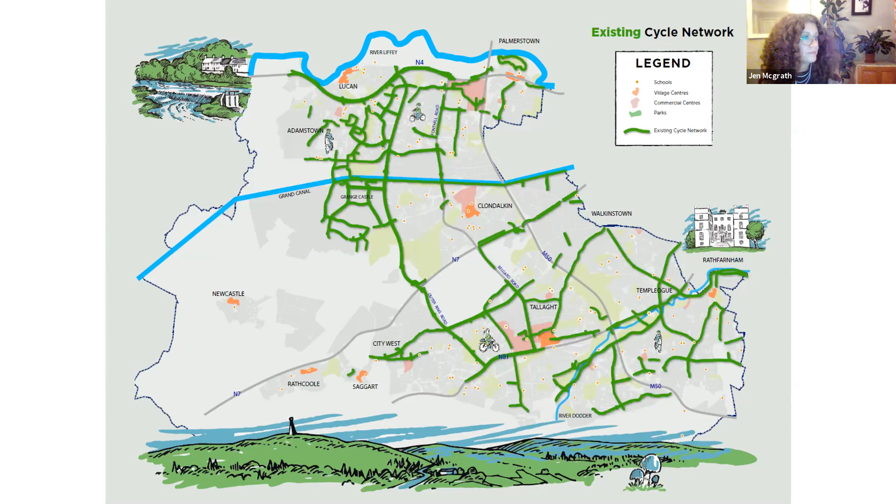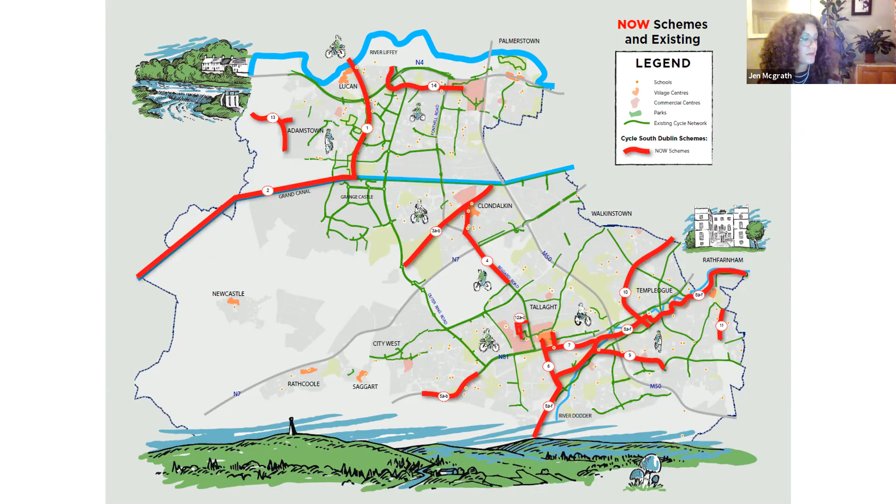The next one is the now schemes. I have another presentation that I'll show you about the now schemes, but there are 14 now schemes altogether. The first one is the Celbridge Link Street, number 1 on the map, 3 kilometers of cycle lanes, completed next year.

The next project is the Canal to Lucan Urban Greenway, 4.3 kilometers, number 2 on the map. Number 3 is the Monastery Road in Clondalkin, with 600 meters of cycle lanes.

Number 4 is along the N81 in Jobstown, where 600 meters of cycle lanes will be constructed, starting this month. Number 5 is the Belgard Square North Link Street into Cookstown, with 510 meters of cycle track to be completed this month, hopefully open to the public in January.

The next one is the Tallaght Town Centre scheme, number 6, with 600 meters of pedestrian and public space to be completed. Wellington Lane's permanent scheme, which currently has a temporary trial scheme, will have 3 kilometers of cycle track built, finishing next year.

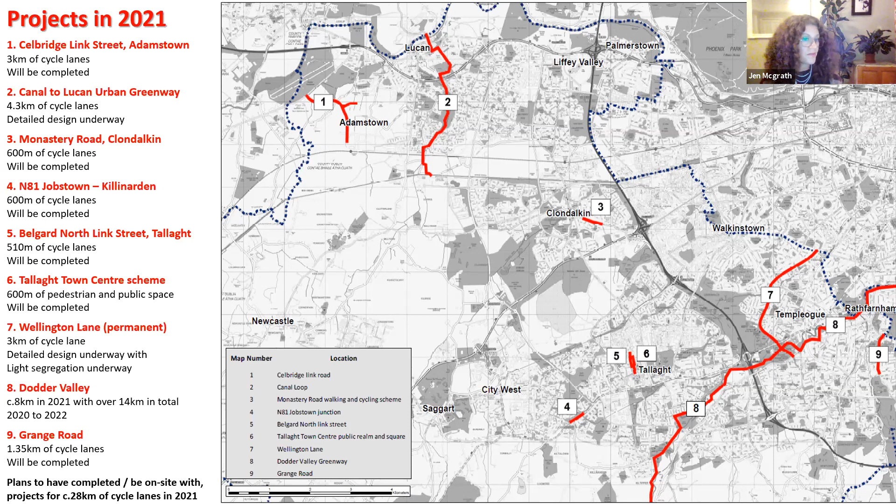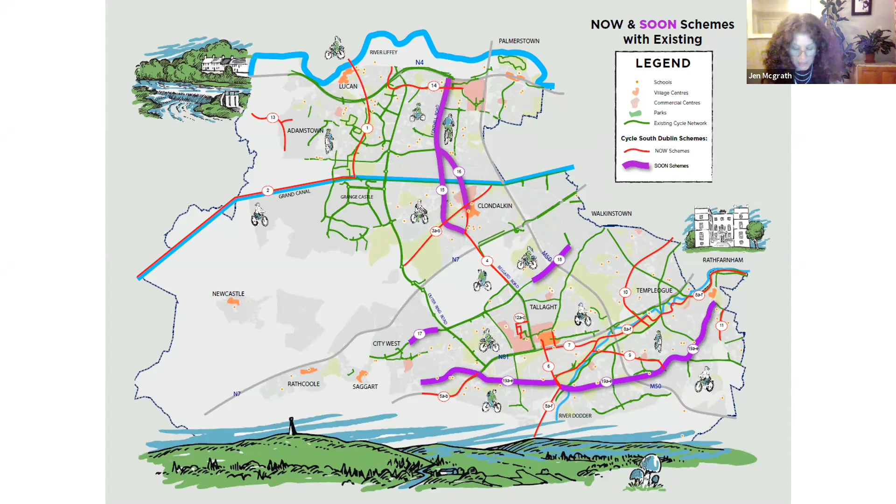The later schemes are now added to this map, with 10 of those, approximately 35 kilometres of cycle track at a cost of 50 million. This map also has the BusConnects added in, and together there are 47 projects which will deliver over 240 kilometres of cycle track over the next 10 years.

We do hope to deliver more than 240 kilometres and more than 47 schemes. It's an ambitious programme, dependent on staff resources, planning, and funding streams, but if we manage to get those in place, we would like more projects and to achieve more within the 10 years.

Next, design work and funding. The final agreed programme will guide the cycle work and priorities of the council, so hopefully you'll make a submission. The public consultation is non-statutory but open until the 18th of December, and we'd love to hear your views if you haven't already. You can find it on the consultation portal for South Dublin County Council.

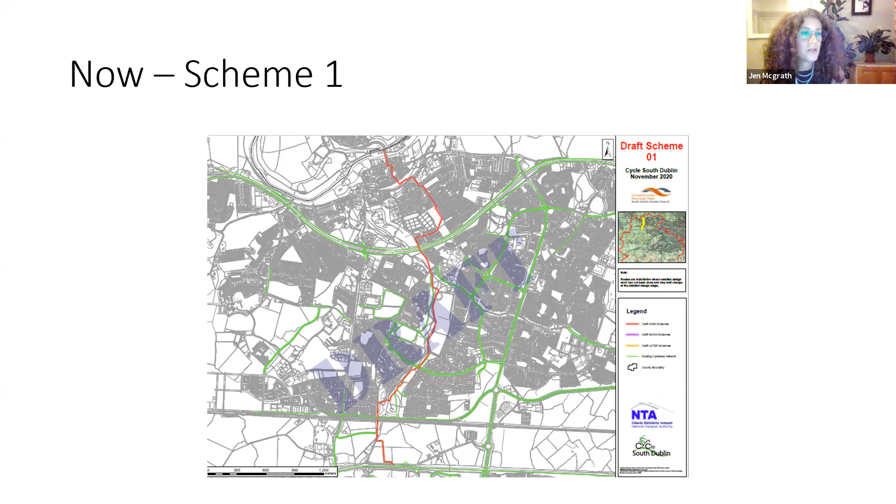So that's scheme number 1 - they're in no particular order by the way, just because it's number 1 doesn't mean it's going to be done first. This scheme is the Lucan Canal Loop. I'll read from the document exactly what it is because I don't want to get them mixed up: it's a cycle lane which will connect the Grand Canal and the Royal Canal. The design options for SDCC selection is underway, and a non-statutory consultation will take place in late 2020. If anybody has any questions I can come back to the maps and we can have a look later on.

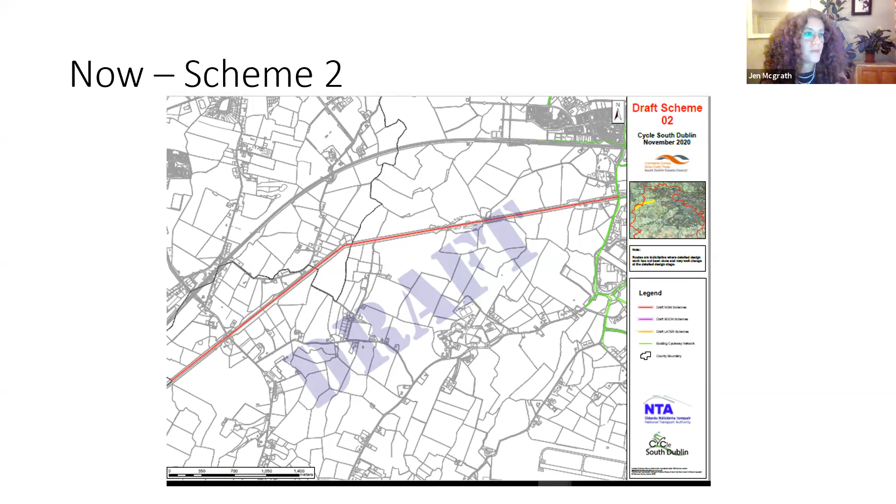Scheme number 2 under the now schemes is the Grand Canal extension. This Part 8 approval is in place, and that's why this one is quite a good scheme, because once the planning is in place, half the battle's over. So that's a good one, and it's a now scheme.

The next one is Corkagh Park to Grand Canal. This cycle route will be from Corkagh Park through Clondalkin Village to the Grand Canal. Design work has not yet started, the preferred route has not yet been selected, and the design will need to provide a connection across Clondalkin Village. So that one is actually quite an interesting project.

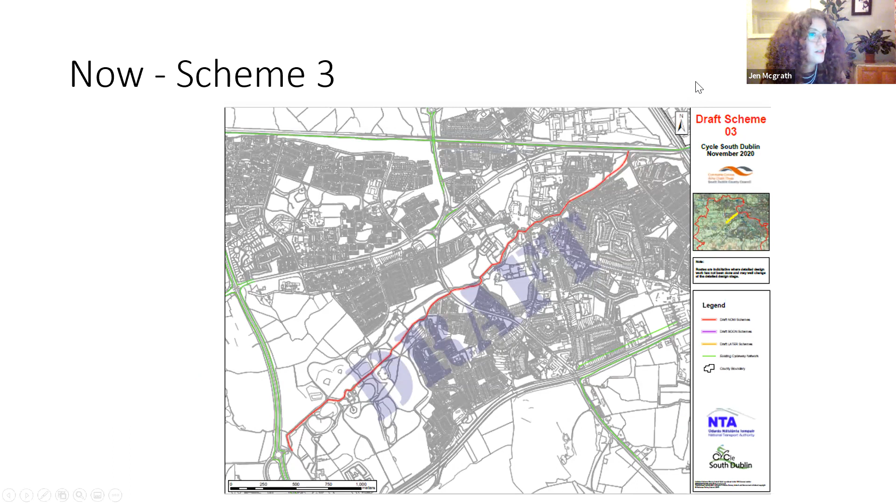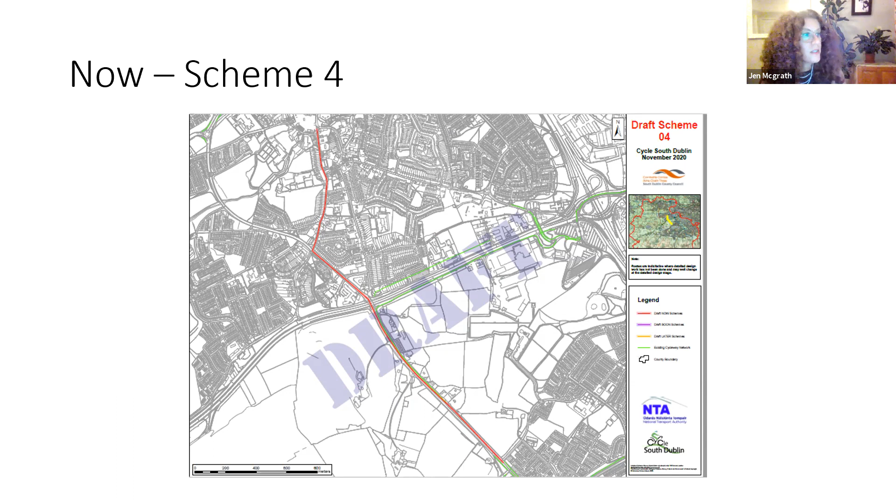Number 4 then is Tallaght to Clondalkin Village - an enhanced cycle route from Clondalkin to Tallaght. Design work has not yet started. There are a number of complex issues that need to be resolved here, the main one being the Naas Road, which is right in the middle there. It's going to be a bit of an issue, but we'll get over it and work it out.

Scheme number 5 then is the N81. We have 2 schemes here: we have a scheme which is the Jobstown Junction to the N82.

Part 8 approval is in place. However, the design may need to be revisited to address challenges on the western section of the route close to the N82.

Number 5B then is the Jobstown Junction. This scheme is underway at the moment, starting in December, and many meetings have taken place, so it's going ahead. Part 8 approval is in place and works are due to start on site in November 2020, but actually they're going to start in December, and it should be complete by summer 2021.

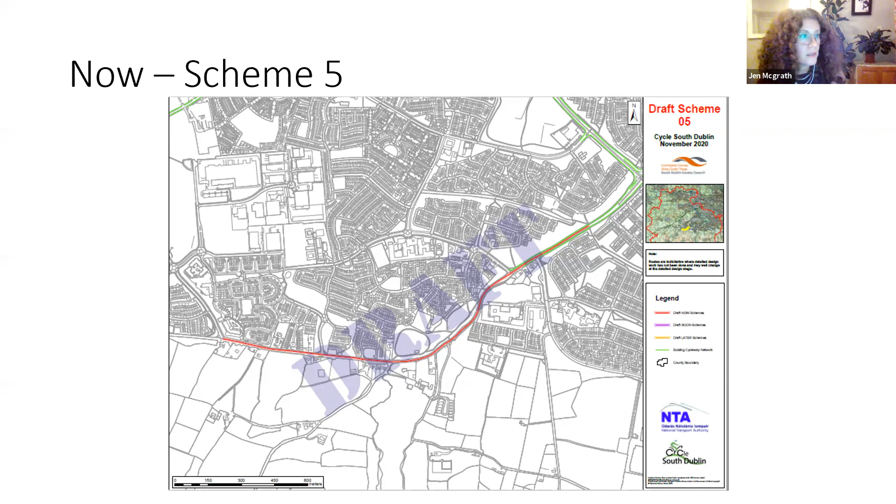Number 6 then is Tallaght Village to Dodder Valley. It's a new cycle route from Tallaght Village to the Dodder along Old Bawn Road. The design work has not yet started. The design will need to address the N81 Old Bawn Junction and the interface with residential along this road.

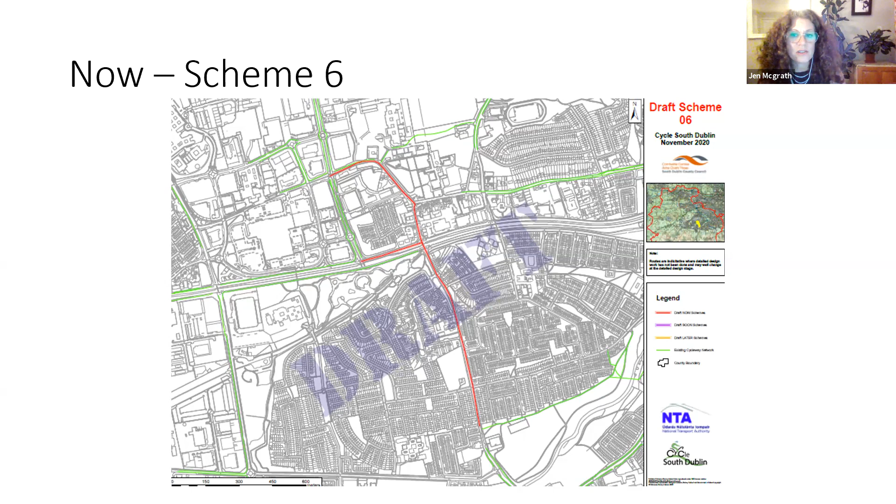Number 7 then is Greenhills Road to Dodder Valley. It's a new quiet way cycle route from Greenhills Road to the Dodder Valley, including quiet way works along Avonbeg Road and a greenway link to the Old Bawn Road. Design work has not yet started, and a significant challenge will be the footbridge across the N81.

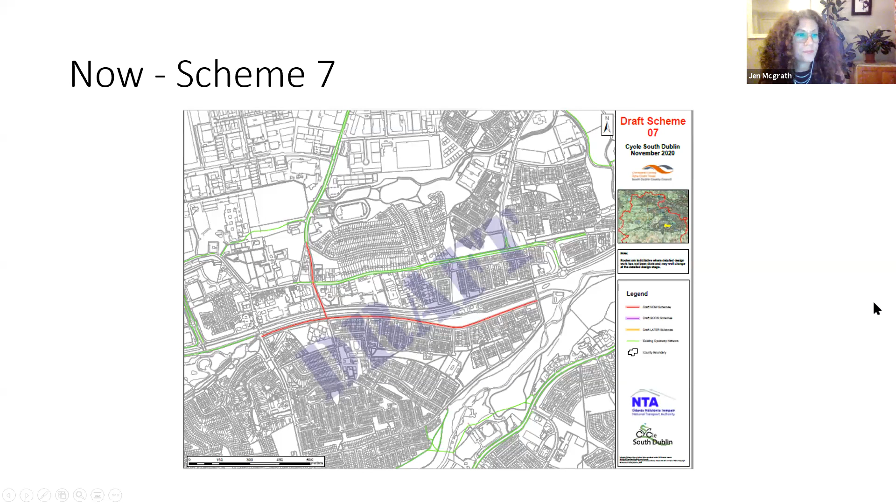Scheme number 8A is the Dodder Greenway Bridges. As you probably know, the Dodder bridges are all installed, and we hope that they will be open to the public by February.

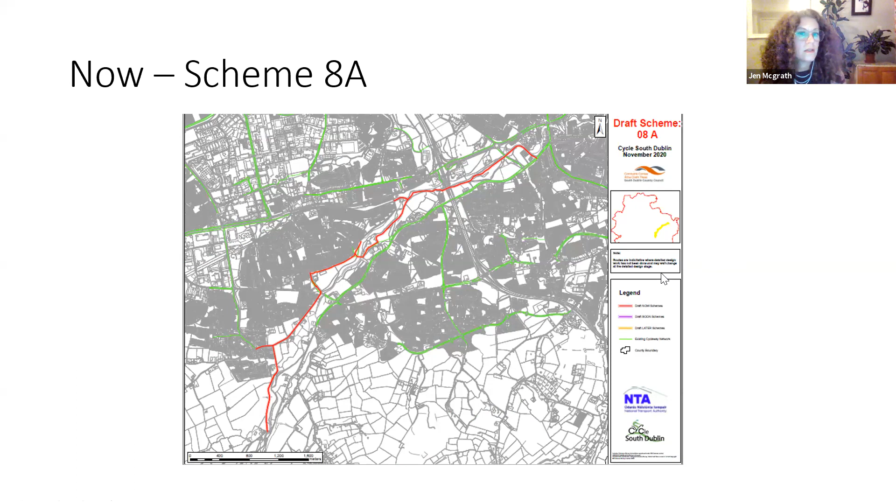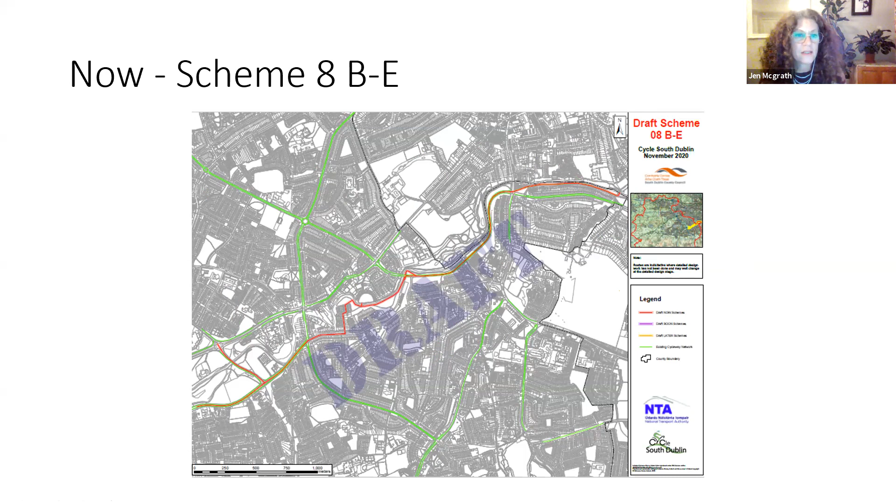Scheme 8B to E is the Dodder Greenway links. There are 5 new links to connect surrounding areas into the Dodder Valley. Design work is underway and Part 8 planning approvals will be needed for some of them, but most of them are complete. Number 9 is the Firhouse to Knocklyon scheme.

Part 8 approval is in place. However, this may need to be reviewed in sections.

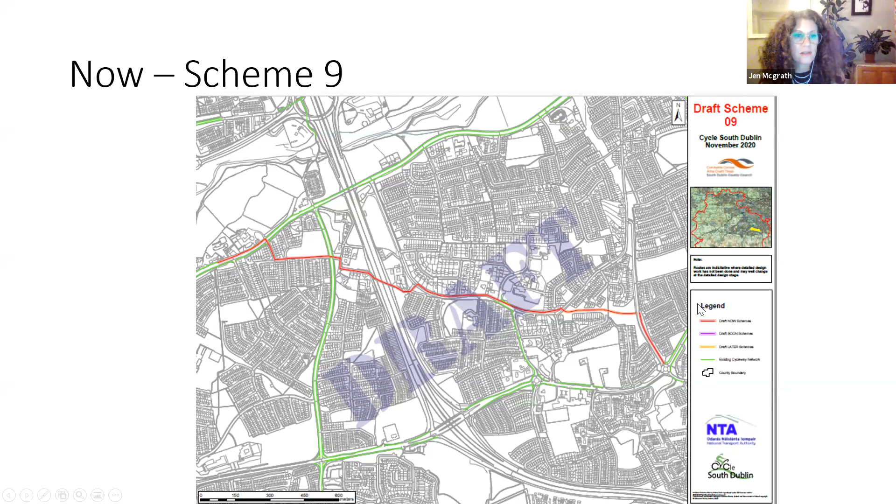Number 10 is the Wellington Lane cycle scheme. Design work is underway and a trial will be implemented in November. It actually started on the 30th of November to put the infrastructure in place, so we just about got in there, and it will be complete in the summer of 2021. Then we will progress with the Part 8 planning for the permanent scheme. We're hoping to begin that in April of 2021.

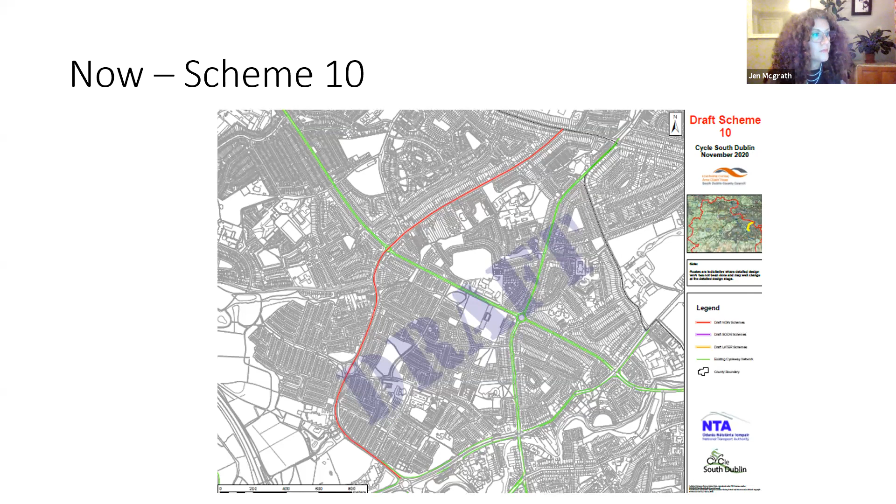Scheme number 11 - I know these are hard to view, but if you do want to come back to them, I can. This is the Grange Road, Nutgrove Avenue to St. Enda's Drive. Works are starting in December 2020 and it should be complete by summer of 2021.

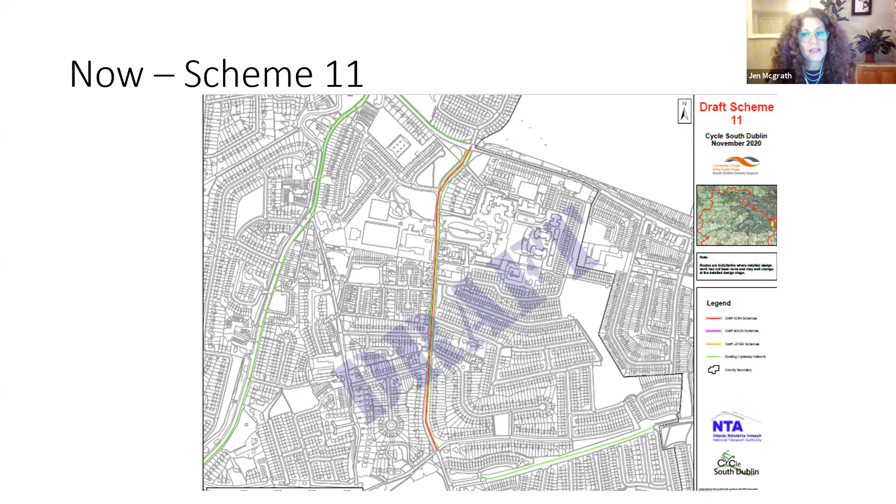The next one then are Tallaght Streets. There are 3 sections to this. A is the Belgard Square North Link Road to Cookstown. Part 8 approval is in place. Works are underway and it's due for completion early 2021.

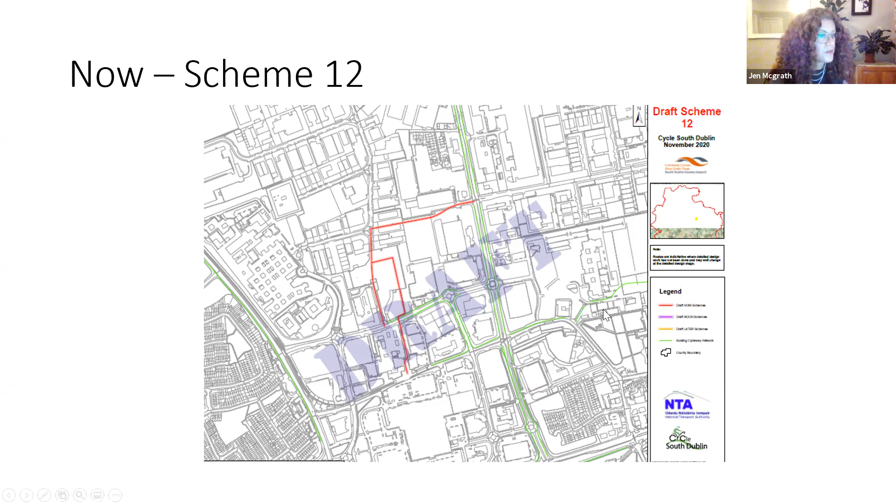B is the Airton Road extension. Detailed design work is currently underway and Part 8 approval is required. C is the Public Realm and Plaza. Part 8 approval is in place and the council will be moving forward to procure a contractor and commence works on site in 2021. So that's quite an interesting little project there - there's quite a few going on in a very small area.

Scheme number 13 is Celbridge Link Road. Part 8 approval is in place and works are currently underway and the completion date is late 2021.

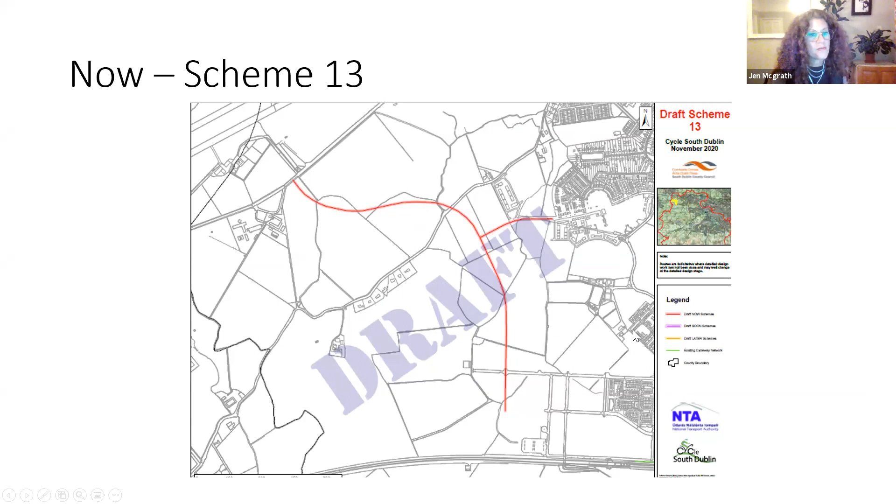And the final project within the now schemes is the Liffey Valley to Lucan. The first one, A, is the Arc Roundabout to Liffey Valley Centre - an improved cycle lane from Liffey Valley to Lucan. Design work has not yet started. There's a significant design challenge at the Arc Roundabout.

And B then is Arc Roundabout to Lucan, an improved cycle lane. There are a number of improvements already in place, but further work is required and design work has not yet started on this one either.

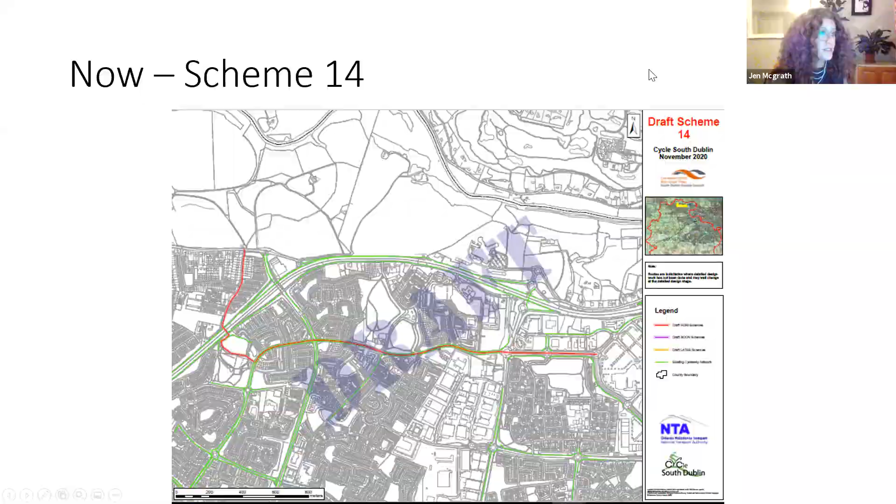And that's me then. That's me done. Thanks very much, thank you Jennifer.

That's very interesting, and I think we're all agreed that there's very exciting stuff coming down the tracks within the county and we look forward to it. Can you take 1 or 2 questions at this stage?

Yeah, sure, no problem. Simon wants to know what's the difference between this and Bus Connects and were they designed in concert?

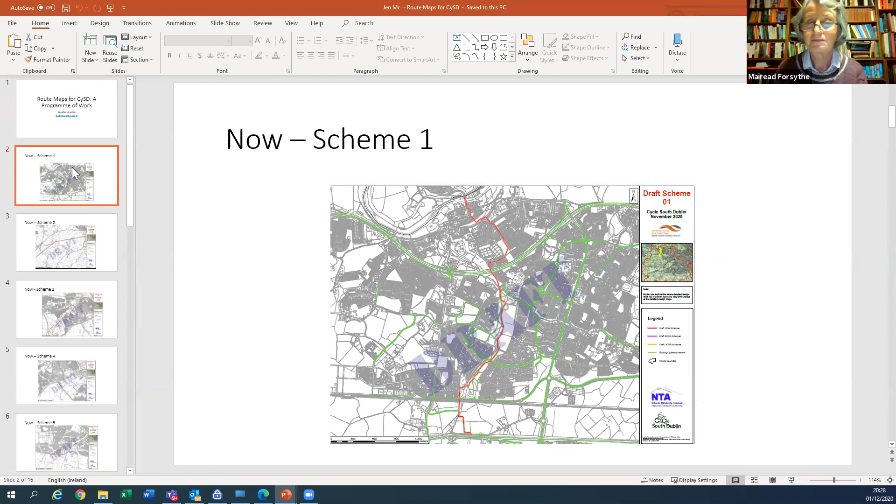Bus Connects was ahead of us, so we decided to let Bus Connects do whatever they wanted to do, and we'd row in behind without interfering. For example, Greenhills Road, which isn't on any of our schemes, was a scheme we had in place before Bus Connects decided to upgrade it. So we parked that and let them upgrade it. That's how we're interfacing - we won't do works on roads we know they're going to upgrade, and we'll let them run the public consultation around the cycle track and bus route.

Another question from Ali: will the public consultation process change the priority? Might a lot of positive comment bump a proposal up the waiting list? Yeah, absolutely. There may be schemes that get bumped up and some bumped down, depending on whether we already have planning in place - we might move forward with a scheme that's already got planning and funding. But we will move things around, and I'd envisage new schemes being proposed that get put into the program that we don't know about yet.

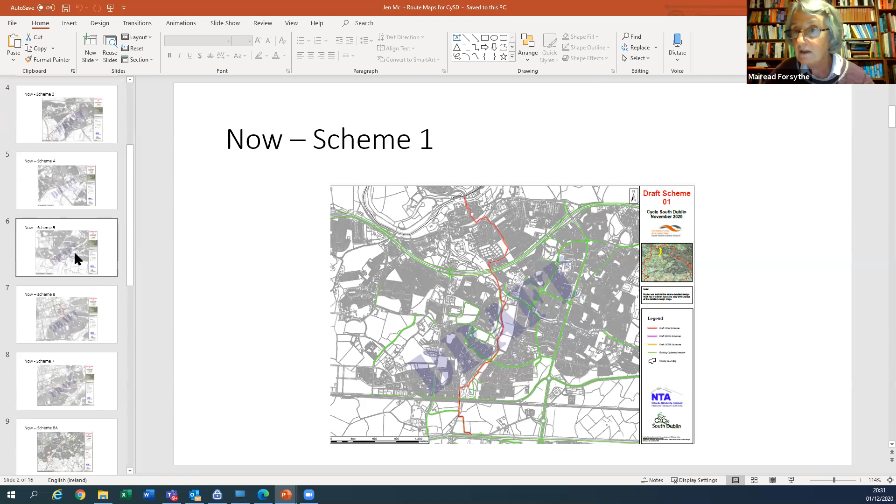So I'll just read out what we have put in: Part 8 approval is in place, however this may need to be reviewed. There are some cycle tracks in place at the minute along Scholarstown Road - this is St. Colmcille's Way, I believe, the road from the M50 up to the Orla roundabout. Some cycle tracks are in place in some green areas, and some of the roads still require the cycle tracks to be built. We're saying Part 8 is in place, however this may need to be reviewed. I think it's because of the difficulties we've experienced within that area, but to be honest I'm not sure - I'm trying to scramble for ideas here as to why.

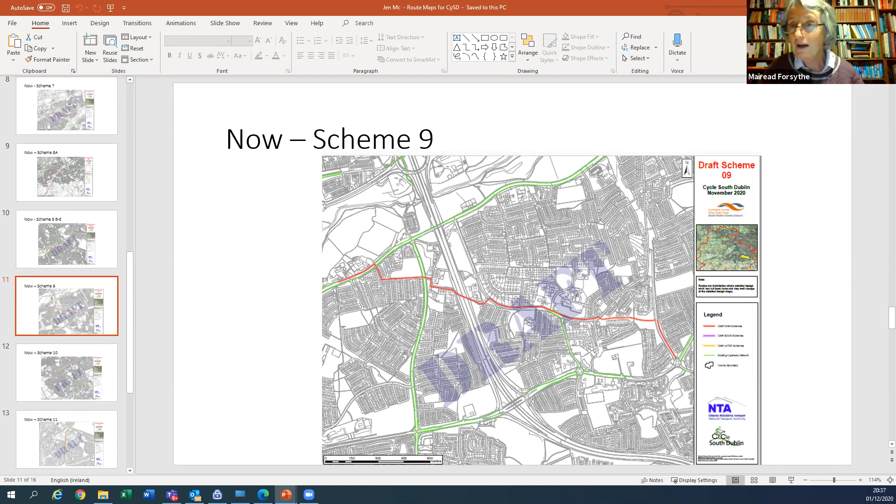I don't know, has Jennifer frozen? But certainly I would encourage people to put in submissions of general support. I think we're used to the idea that sometimes a very vocal opposition can defeat a plan, so if you want to see Cycle South Dublin implemented, send in a general submission of support. Sorry, Jennifer, you seem to have frozen up.

Anyway, I think it's time to move on to the next section, which is to talk about Bus Connects. The idea here is, Myrna, I think you're going to share a screen.

There are seven Bus Connects routes within South Dublin County. One of them really is Kimmage to the city centre, so it doesn't go through the county, but many of you may use it. The people involved in the campaign working on submissions for the Bus Connects proposals are going to give a rundown on what's been proposed in the latest round, and what will be in our submissions to the National Transport Authority. We'd urge everybody, when the submissions go up on our website, to look at them and make your own submissions before the 18th of December.

We'll start with the first person to talk, Martin Quinn, who's going to talk about routes 6 and 7, Lucan and Liffey Valley to city centre. Are you ready to go, Martin? Yes, I am. Can you hear me? We can, perfect. Okay, I'll just give you a quick overview of the route.

It basically goes from Lucan Village along the N4, past Woodies, into Palmerstown Village, and as far as Chapelizod. It's going to be a two-way cycle route on the north side of the N4. Could I have the next slide, please?

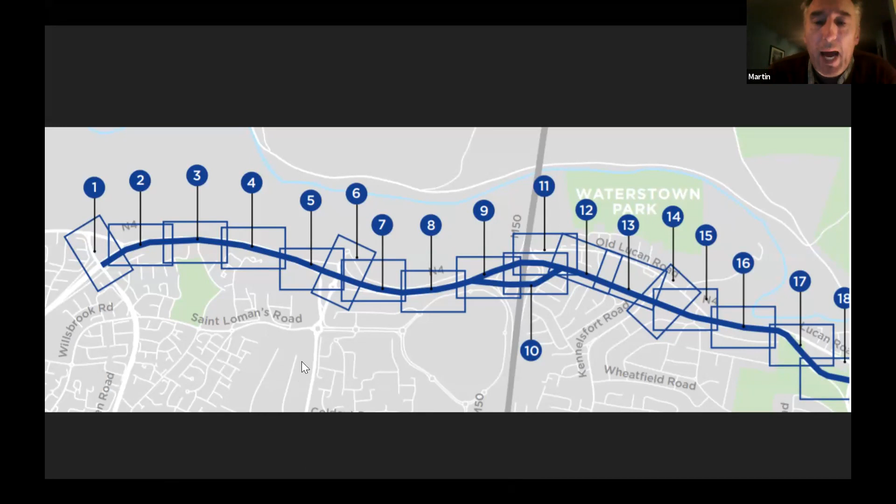Okay, so I attended the meeting, and overall most people were in favour of the cycling lane. From Dublin Cycling Campaign's perspective, we are broadly in favour.

We did ask some questions, like will there be a buffer zone from traffic on the N4? And the reply was that due to the trees and space constraints, that's probably unlikely.

Without a doubt, the biggest contention was the removal of 50 car parking spaces in Palmerstown Village. Some of the resident associations asked, could it be made a quiet way? But the NTA was of the opinion that it was just too busy to be a quiet way.

It also ends at Chapelizod, where the city takes over, and the NTA was of the opinion that the city has its own plans. And so that's the reason why it ended there.

Chapelizod Hill is going to be widened as shared space with pedestrians on Chapelizod Hill. At the moment, I don't like it at all. Cyclists build up speed on that hill, and it's very dangerous for both pedestrians and cyclists.

So it is going to be widened by an extra metre or so. Hopefully that will make things a little bit better. But overall, very good from a cycling perspective.

We're getting a two-way cycling path on the north side of the N4 all the way to Chapelizod. That really wasn't there before. And we're protected going through Palmerstown.

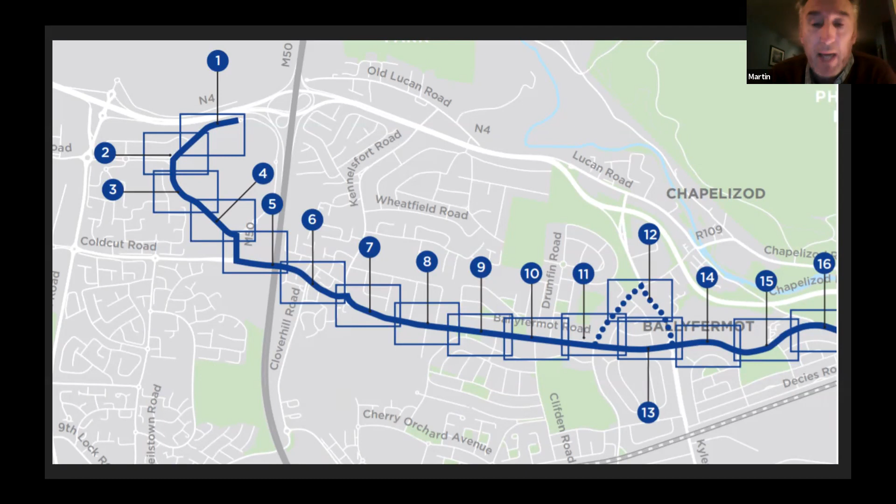So it's a huge increase in cycling facilities for the general population. It's an amazing amount of work being put into it. Could I have the next slide, please?

And that's fine. Some trees will be removed from across the road from Markievicz Park, but that'll be kept to a minimum. Some of the disability groups have asked, will all bus stop locations have clear demarcation from cycle lanes? And that is yes - they will be a separate colour, and there will be a height difference for pedestrian and cycling access.

Some of the residents' associations have asked for add-ons, one particularly from Emmet Road down to Inchicore, and also from Kennelsfort Road to add onto the cycling plans. But the NTA decided that was mission creep and decided against it. That actually depends on South Dublin County Council adding those facilities.

So I'll now pass you on to Aidan, who will do Clondalkin and Green Hills.

Hi everyone. Thanks very much, Martin. Fair play, well done. Just a quick run - there, one's not so bad a route, the other is a mighty route down from Green Hills.

But just to say, I went along to the webinar for routes 8 and 9 as well, which the NTA held, and had a very detailed kind of rundown on the routes, and it's all available on the portal.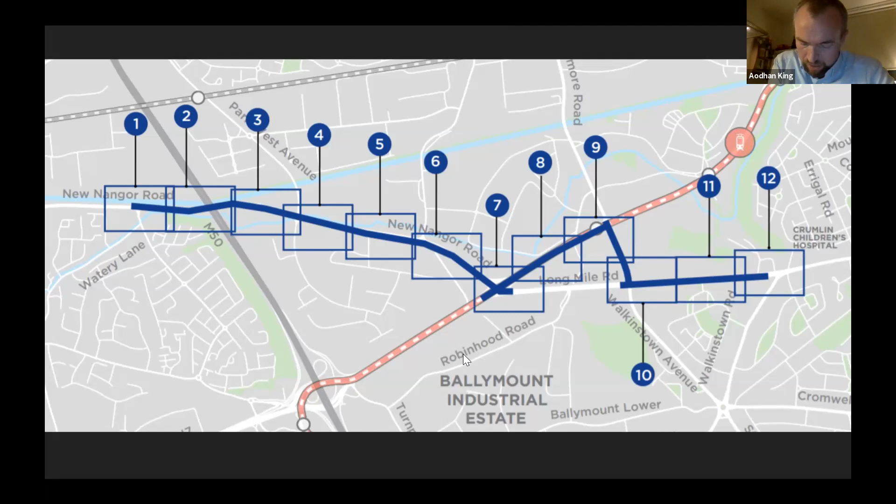So then it meets up with map 12 there, it meets up with CB9, which is the Green Hills route. So I'll just go on to the next slide there. Sorry, Mairead, thank you.

So there's an example - kissing gates connection to greenway. That's at the very start at the Clondalkin end, which connects there. I have some photos of families of literally 6 or 7 people lifting their bike, a family, over that kissing gate when I went out for a look. And that's a major connection there to the estate and to the south of that.

As you come down, then there's the M50 overpass, which in fairness now they've provided an access to, just probably about 50 meters down the road, and that's to be open. But that needs to be cheered up a little bit under there - I think security is important, like how people feel, they need to feel safe traveling these routes. That's actually a big issue with that Greenway as well, how safe and permeable it is. If it's going to be looked at as an option for people on the BusConnects routes, then that needs to be improved and allowed for as well.

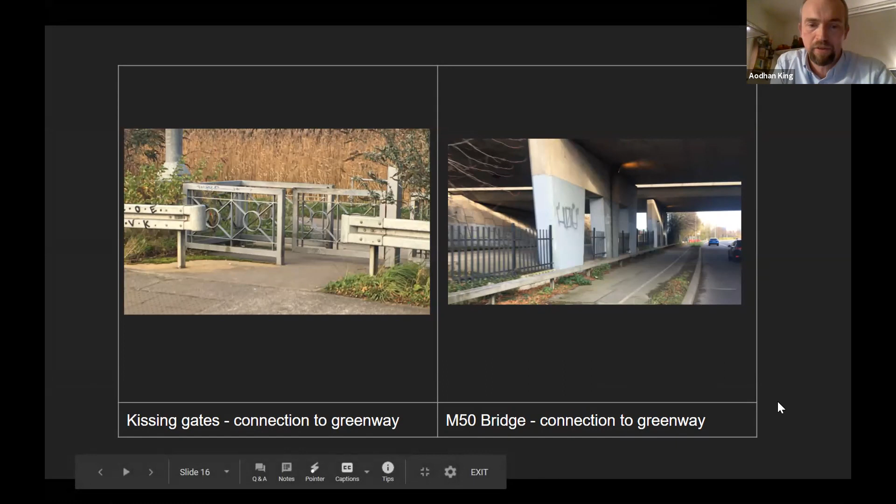Okay, so just on junctions, that's a typical one coming down the Long Mile Road into one of the units there. You're left to come off a footpath as it is, but the new junctions, as you can see, they've put a raised table for pedestrian access, but haven't included the bike lane on that. That's a big piece I'd be keen to push.

I'm sure we all would. So separate the bike from standard traffic. Now it looks dotted, obviously to be finished in design, but it hasn't been. The NTA said at the meeting that they had done a lot even since this was issued.

That's why I think there's another round, Ray, because I think they said themselves they hadn't got the drawings up to a point yet where they were ready, really, fully even. So...

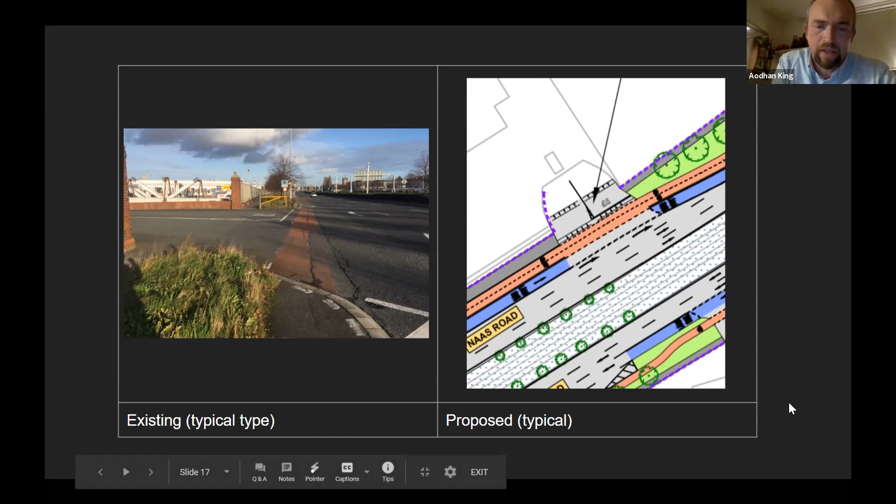Anyway, from that, next slide. There's just an example of what I mean, we'll put in something similar. I think we'll probably get some stock images, Mairead. I think it's good to show all of us that this is what we're looking for, a clear separation from the road, so cars have to stop and think before they turn left into oncoming cycling traffic, and cyclists have as much right of way to keep their momentum as they move into town.

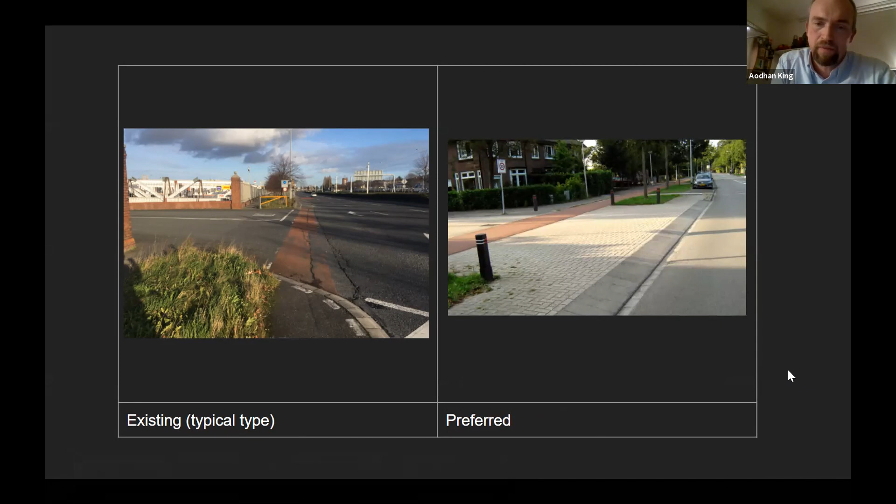Okay, next slide. I'm probably over-emphasizing the point here, but that's what that is—it's the same figure again, the Nangor Road. I'm just saying, as you come into town, it's the same: the whole way coming into town, the secondary road takes priority each time over primary right-of-way traffic. That needs to be done away with, I feel, to make us safe.

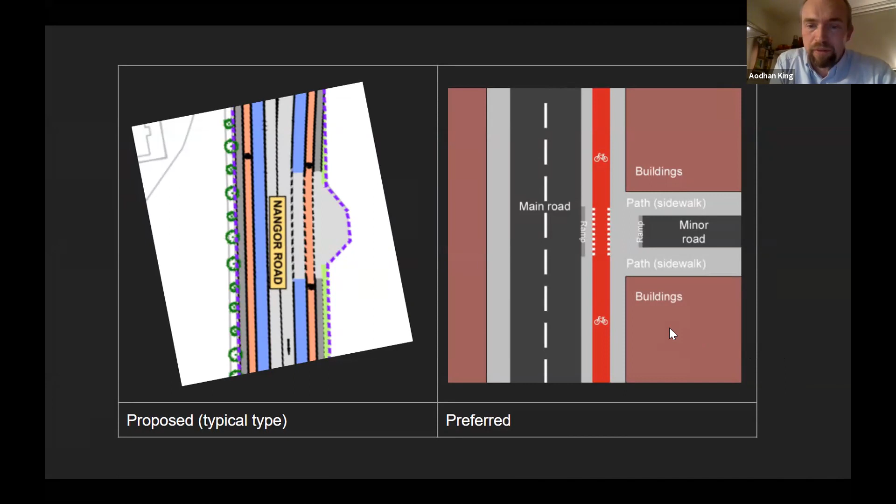Okay, next slide. So one of the jewels in the crown of South County Dublin, now known as the Hamburger Junction, which is up to date. Before this, I only knew it as the Long Mile Road roundabout or whatever it was. So they couldn't come up with a clear, safe route around it for cyclists.

So they came up with an overpass. Well, they discussed an underpass, but that was dismissed because of costs. That was put forward by Owen O'Brien and a couple of other people at the time, and the costs were said to be too expensive.

So they've put an overpass, but unfortunately this still-to-be-determined design is one of these big double ramp affairs, getting up to a height—you have to come around on yourself three or four times before you get over onto the roundabout. Honestly, as a cyclist, not particularly competent myself, I would probably take my chances with traffic as opposed to spending 40 minutes trying to get over the bridge.

So we think there are options, and we think NTA need to look at new options. This is a major gateway to the city, and it's a real opportunity to show how 350 million euro a year in cycling can be spent, and I think we need to go there.

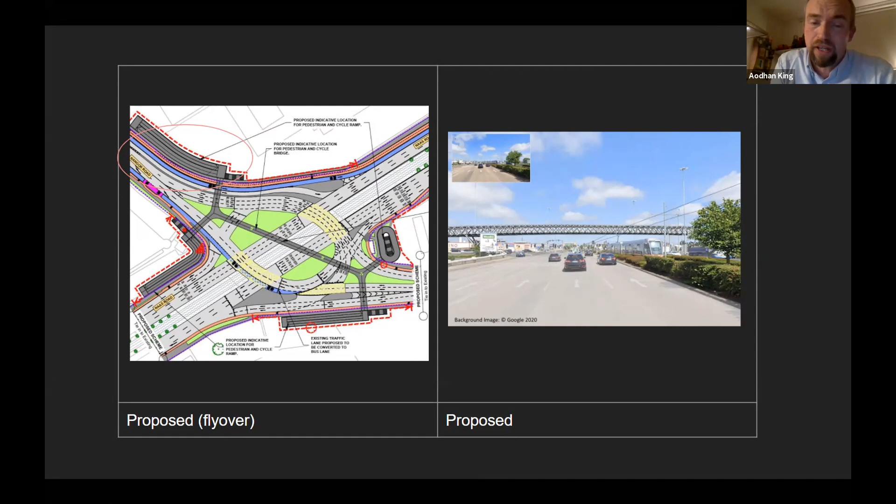Now, it doesn't look bad from here, but it's this typical design of cage steelwork over a road. Next slide, we probably show what good looks like. So there's the Long Mile Road as it looks, and here's the Hovenring in Holland, which is, in fairness, like a ramped-up access. There's a lot of space needed to get to it, but it's there, just to give an idea.

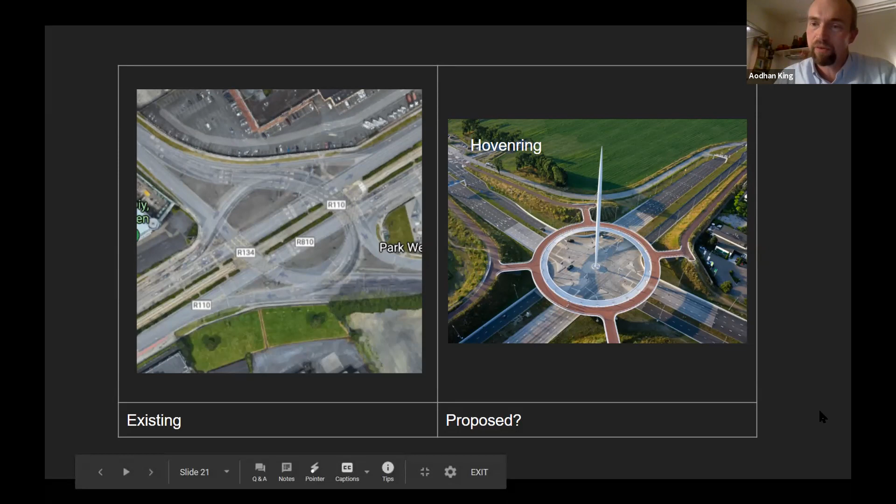Look, a bit of engineering, guys, a bit of thought into what might work here. In the existing layout you can actually see the road lines there—loads of spare space to build things up and to suspend things off. Surely with a bit of creative mind and engineering foresight, these guys could actually put something in place that could really be a totem to the rest of the world for Dublin, and South County Dublin at that. Next slide.

And then I spoke about the desire line, that the BusConnects brings us down the Long Mile Road as far as the FBD there and the old Naas Road, and then takes a right down Kylemore back to hit the Long Mile.

That obviously is going to dissuade cyclists from cycling into town. I know it's about buses, but part of it is trying to get the infrastructure in there. That's just an example of how a desire line works in reality - people will follow the shortest path. So I do think it would be worth them looking at that connection to see if they could improve it even from a cycling infrastructural point of view, to aid their Bus Connects project, or even South County Dublin, if Jen's still there, we could look at that.

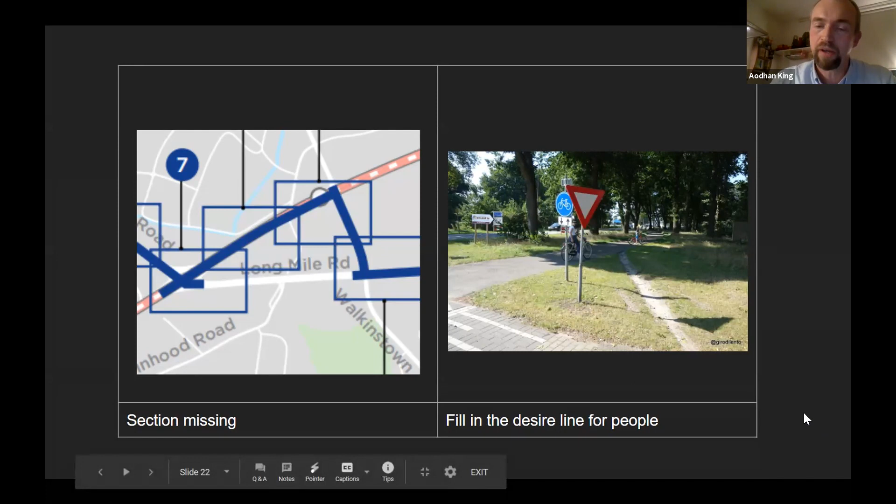This is something they've kind of stuck to - how things seem to work on the Long Mile Road. There's a lot of schools, we have Aldi now, we have a lot of big shops, the Farmers Cafe. There's a lot of people coming up from Walkinstown Court, a huge estate out the back, and they follow that road, and none of them use the pedestrian crossing as it stands. I took photos there, people just coming across from the road. So that should all be a raised platform, access for pedestrians coming across, to slow down traffic along that road.

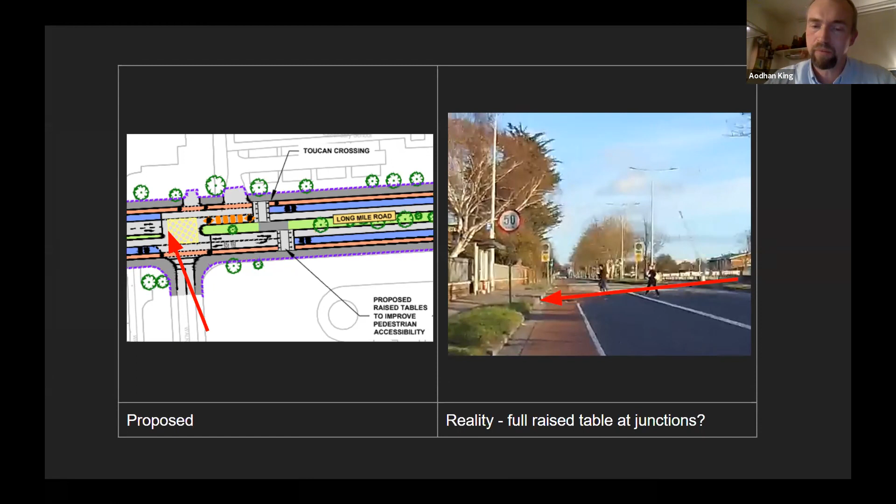That's an awful place to be. Actually, I noticed in their new greening brochure, they had removed the green line of tree buffers in favor of just keeping the footpath and not actually improving the urban realm element of it. So those things need to be brought back in, definitely, because it's just a speed tunnel as it stands.

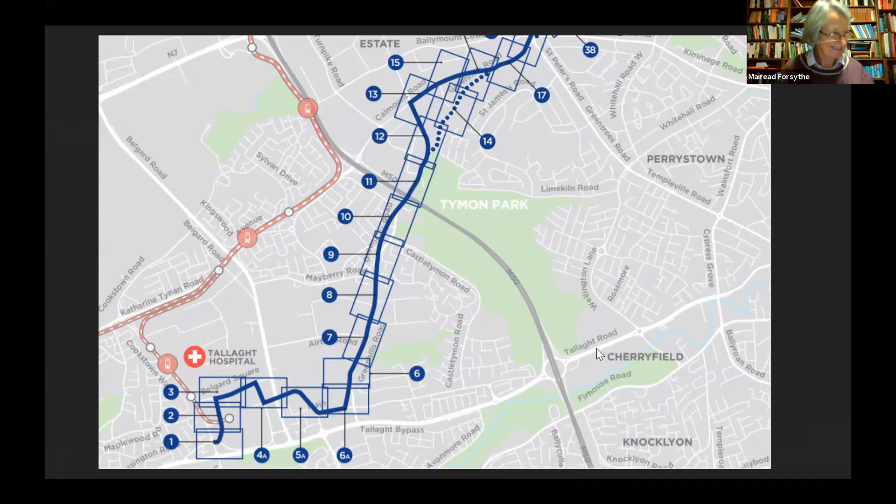I got a bit, okay, Grant, thanks. I got a bit snap happy on that one. So, okay, so back to Green Hills, which is the main one. I have a minute. I'd say I won't want to labor too long. About a minute, yeah. I have a Mairead, but this is like 44 maps, right? So I didn't know what he was getting into when he took this on anyway.

So really Green Hills, what can I say - it's serviced by a really great connection from the Poddle, or from Green Hills down through Poddle Park, the back of the basketball arena, and into Tymon. So actually there's loads of potential soft routes for cyclists and other people coming down the way, which I think need to be looked at in general around this route. But there's obviously the main Green Hills route, so I'll just talk about that as we come down.

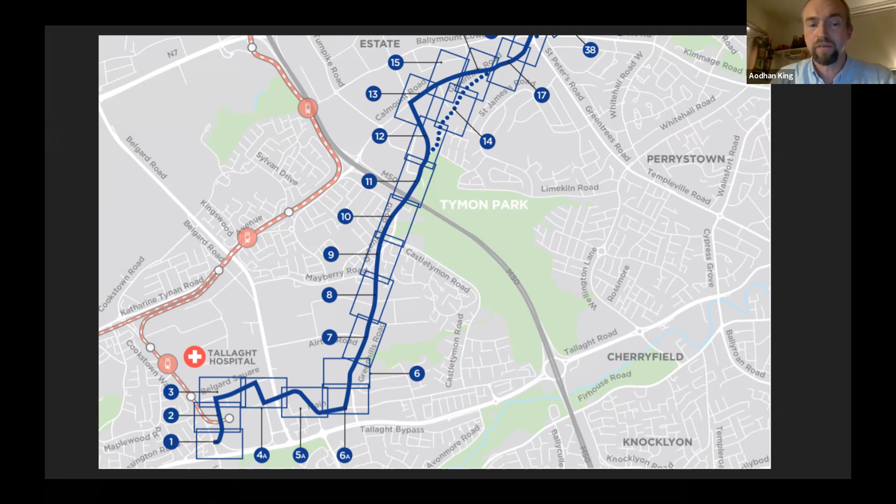From Tallaght, there's a whole new bus interchange at the start. It's mad - there's no cycling allowed for, no segregated lanes up there. So it's just literally about getting people on buses, but there's nothing about the community being drawn into Tallaght to bring their bikes in, cycle to the bus, and then take their route onwards to Dublin City. I think we really need to raise that as an important one as part of the Green Hills route.

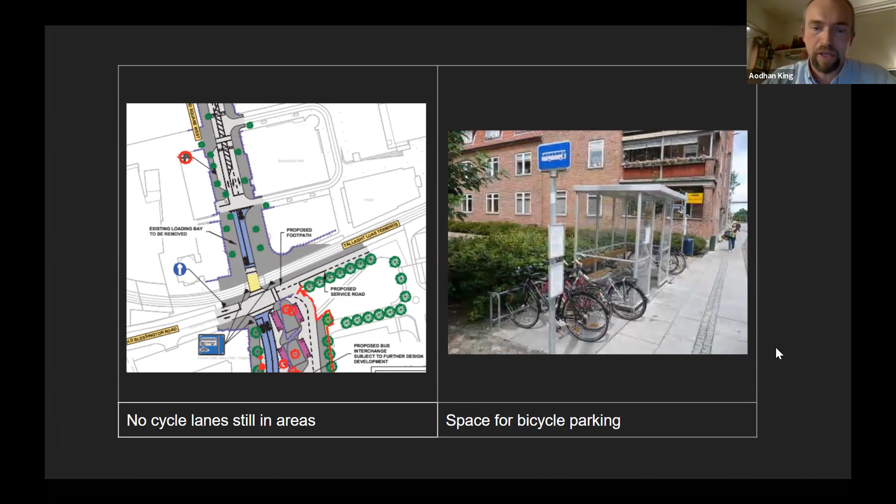That's a Dutch example, or somewhere, an example of what might happen. I think that example there is more on every stop - there should be something like that, where people can park their bikes and feel safe to leave them. That's up for debate as well.

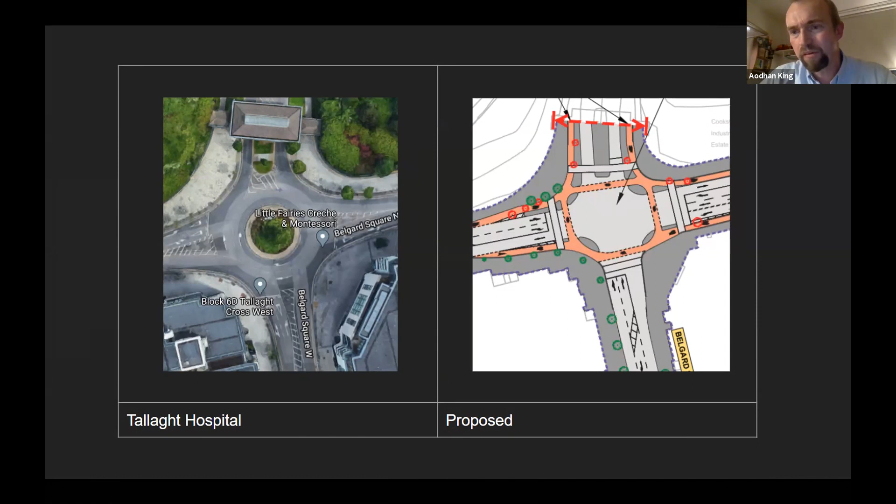Here we have a junction proposed for the Tallaght Hospital. I actually believe that the junction causes problems there. I timed it myself as if I was going around the junction, and it took me a minute to get around that, even without lights, from just south. And when I went around the roundabout, it took me 30 seconds. So that's always going to happen - these junctions are going to throw cyclists out onto the road, and I feel we really need to push Dutch-style roundabouts, priority cycling, priority pedestrian-style roundabouts to get people through and in, and to promote the use of that.

The next slide, I think, just shows an example of how that might look.

It's quite straightforward. The roundabout's already there, so to be honest, it looks like the job to me. I'd be putting that forward for this particular route, unless someone overrules me. I think that's the safest way - it gives drivers appropriate time to see cyclists coming, puts them in their eye line before the left turn. It just meets everything, but we'll have to debate that. Okay, on to the next slide.

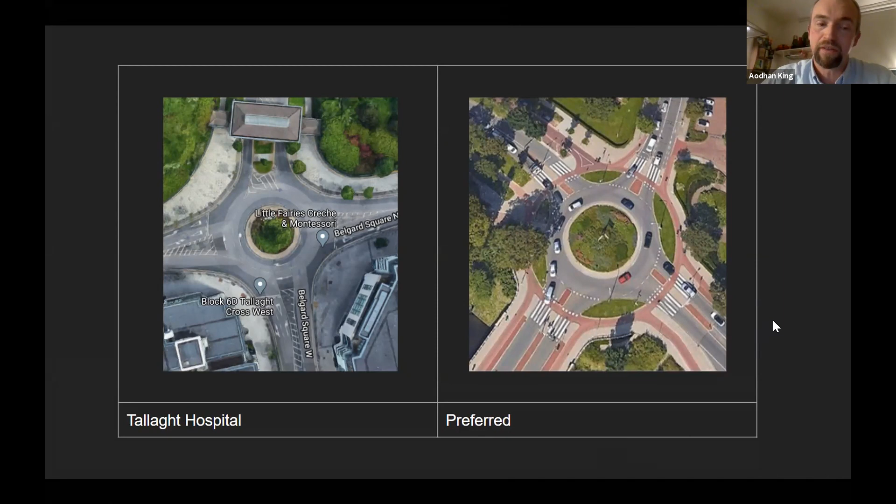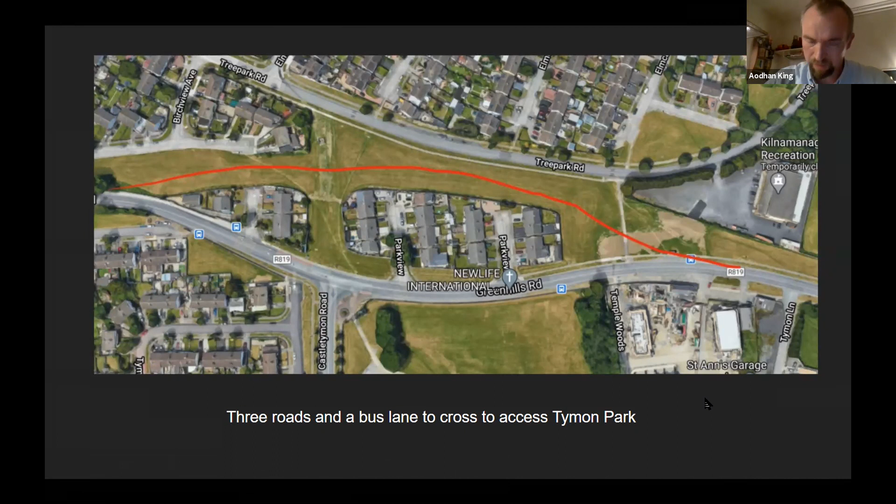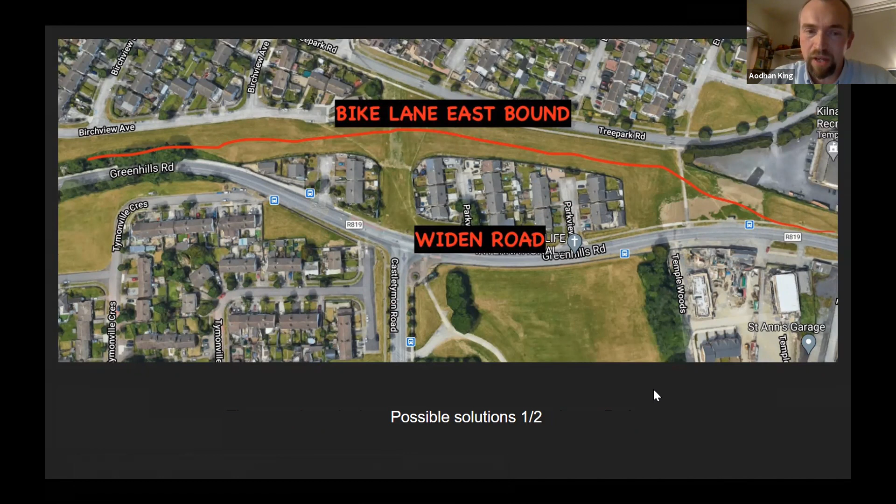So Kevin came up with the next slide, where he said that if we made the North Road more of a bike lane, then looked at improving the width of the road on the Greenhills Road, we could potentially have an eastbound lane further down. So really, looking at it and from cycling it myself, I know it's just a few lines on a picture now, but it seems very reasonable what he's put across there.

I think we should probably put that in as a suggestion and urge them along. We'll dress it up a bit and show them how the cycle lane - they're kind of using the cycle lanes as a reason not to have the Greenhills lane as the road, saying we need to build this whole new road because of the width needed for everything. I could be wrong on that, but that's my impression. So I think we need to spell out, here's maybe a nicer option for how a cycle lane works and doesn't cut off the community. That would be a good thing to show. Okay, next slide.

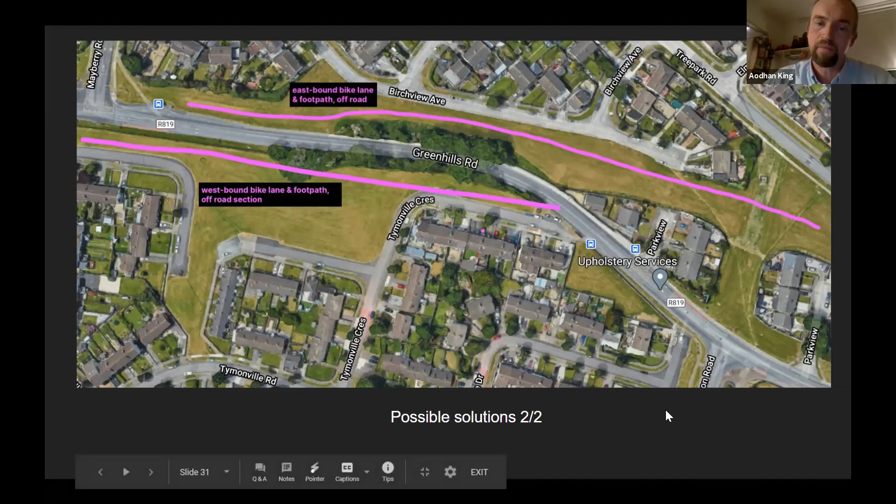Okay, get to the point - we'll walk and talk around about that, and yeah, we have to get to Crumlin as well. Two very important points - there's Walkinstown roundabout. As we know, they've tried. I thought at first they'd succeeded, because the bike bus used to come around by the corner there, but unfortunately it's just too complicated, so I didn't like the Walkinstown roundabout anymore.

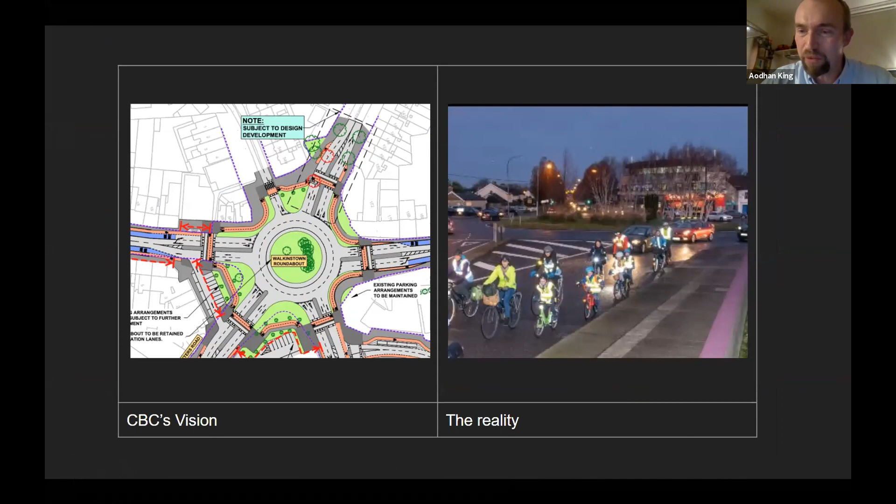Next slide - this is Walkinstown roundabout as it was back in the day. Let's go back to first principles. How did it used to work like that? Why do roundabouts come in? They need to design something new, so let's see where we go. This might be awful - this is one idea that came, but we have to think.

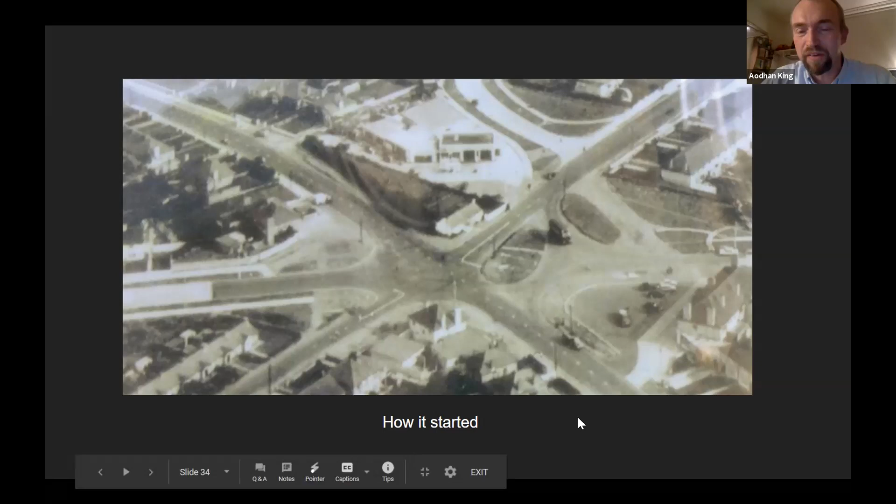The next slide is an overpass with an underpass cycle lane. Got to think big. I think something is really necessary at the Walkinstown roundabout, and just putting patch repairs for a roundabout with mixed transport that's going to take half an hour to get around isn't going to be good enough. It's not going to improve cycling in the area.

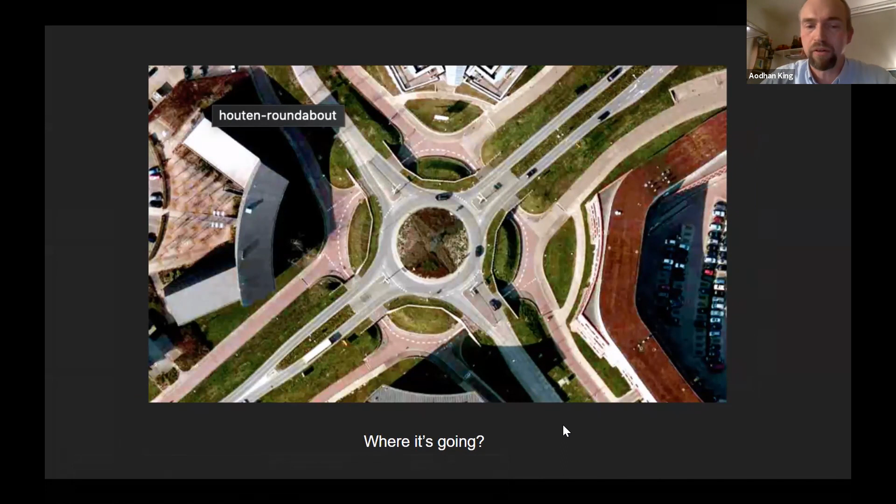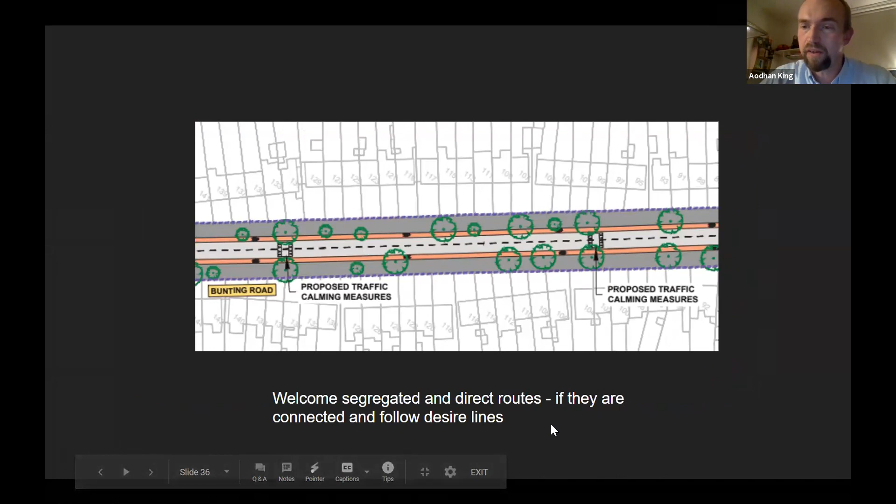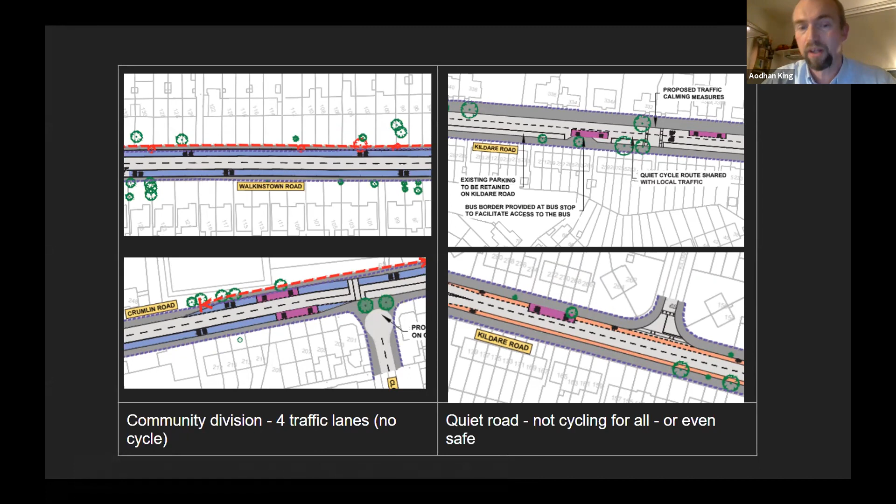Okay, very quickly - if we go on, there's a lot of traffic calming measures and quiet roads being put in the area. This one isn't too bad, it's down Bunting Road. If we move on, we have other examples further down that bring us down Kildare Road, which is mixing cycling with buses and cars. And then it's creating a 4-lane highway on Crumlin Road in spots - it's buses, which is great, but it's just too much traffic. The quiet road is where all the traffic is going to go and cause problems with cyclists and the people of the area.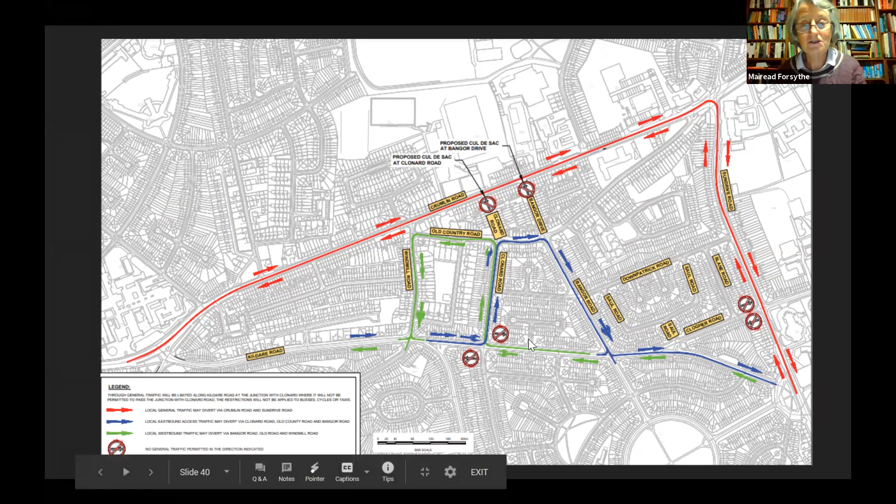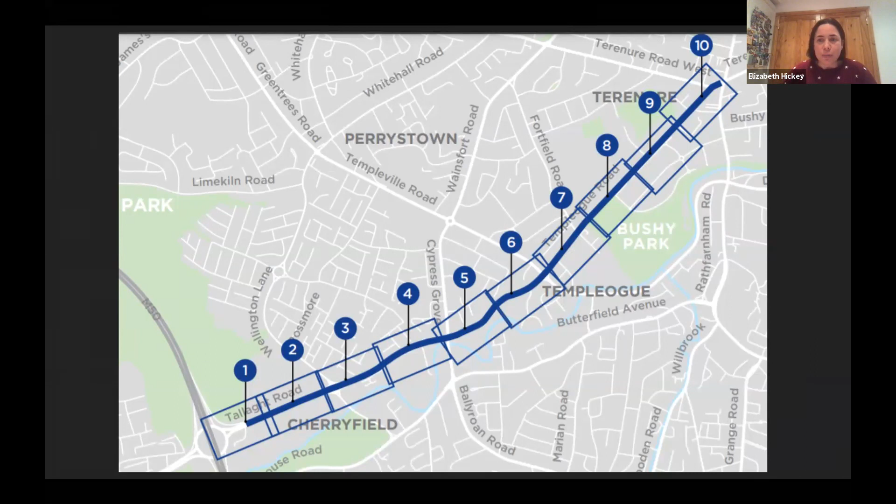Hi everyone, so myself and Mairead have been working on Tallaght to Terenure. Just to highlight, it starts off at the M50 junction on the N81 and goes right down through to Terenure Place. There's nothing dramatically radical or overly contentious on the route, but we'll give you some of our opinions on what we feel. If you go to the next slide, Mairead.

Two of the things that we're in favour of: one is the Spawell roundabout will actually be converted to a junction. The Spawell roundabout, as you know, is a very large, busy roundabout with traffic coming at high speed off the M50. So we feel a junction would be safer for pedestrians and cyclists, and it would be easier to control from a signal perspective.

And then the next big piece of infrastructure we're happy about is the new cycle tracks on Templeogue Road that join the Fortfield junction. As you can see, there's a diagonal that connects to Bushy Park. This will be great for those who want to get to Bushy Park, but also those who may prefer to take the proposed quieter route from the NTA.

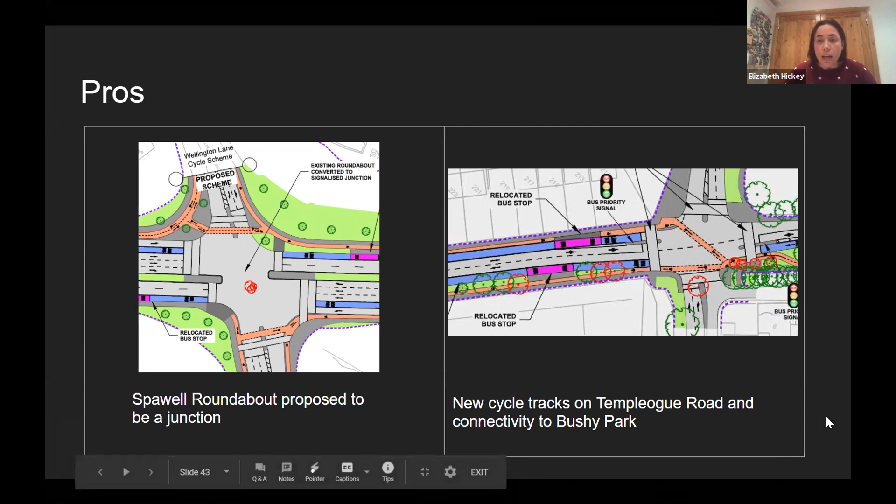If you go to the next slide. We do have some concerns about the route, and in our submission we've listed a few more, but I'll highlight three today. The first, fundamentally to Aidan's point as well, is that we're really concerned about the junction design. We don't believe they're up to best international practice because we're concerned about cyclist and car conflict with them. We're also concerned about connectivity to suburbs like Knocklyon, Firhouse, and Ballyroan, where the connecting infrastructure hasn't been upgraded.

You can see that on the Spawell Bridge and even the Templeogue Bridge, which will still be a very dangerous environment for cyclists. So we'd like to see them upgraded as well, either as part of Bus Connects or by South Dublin County Council. And the next thing we're obviously very disappointed about is Templeogue Village.

We recognize that the Templeogue Village initiative by South Dublin County Council is going ahead, but we're disappointed that option 2, proposed by the NTA, isn't being progressed. We felt it offered better cycling and pedestrian facilities in general, and a better public realm. So we'll be voicing our continued disappointment, as we think the conflict fundamentally still remains.

And then finally, once you get past Bushy Park, the NTA are recommending linkage through what they call quiet roads, through Rathdown Crescent, Drive and Park. For anybody who's been down there recently, they're fairly busy because they're servicing Bushy Park. So again, we really want to understand what's meant by a quiet road.

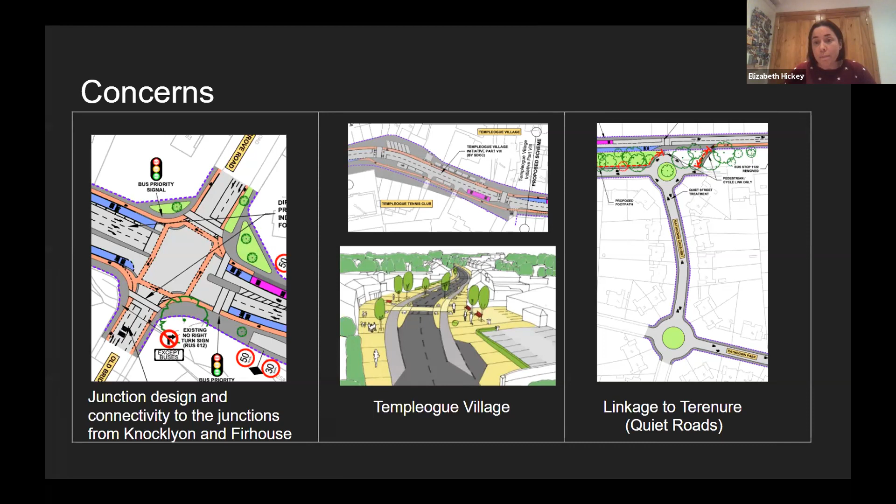The Dutch and the Belgians have outlined this very clearly: the bicycle has priority, there's no parking, there's special treatment on the streets. So I think it needs to be a legislative change to make sure they are safe roads for all, cycling for all, which is what we're really advocating and hoping Bus Connects delivers upon. So that's me.

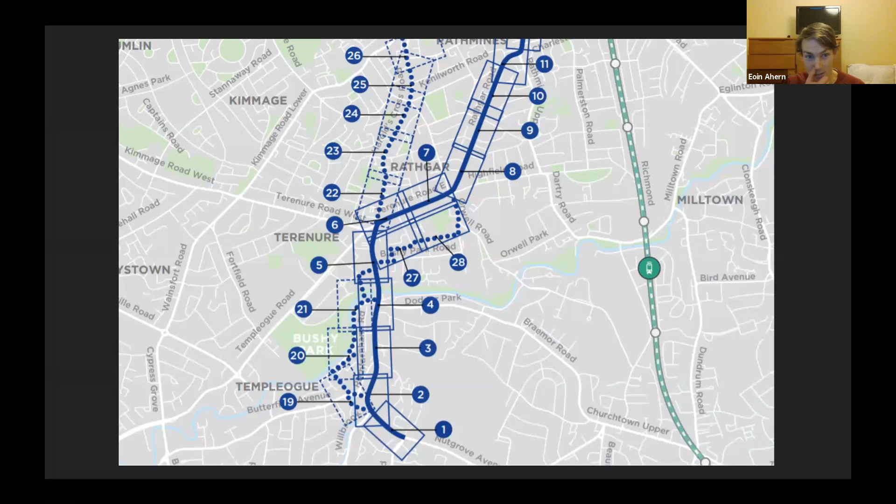So I'm only going to look as far as Terenure this evening, from the South Dublin side of it. So it's not all bad news on that one.

There's some improved junction design, particularly at the very start of the route at Grange Road, where it joins up with Rathfarnham Wood. There's a much better protected junction design there, linking into the proposed Grange Road cycle scheme, including a new islanded bus stop at the corner of Grange Road.

Still nothing linking it into the existing cycle lanes on Nutgrove Avenue there at the left of that image. So that's something which definitely needs to be improved on. I think that's just where the boundary with Dun Laoghaire-Rathdown is, at that junction, so they need to interact with whoever's involved there.

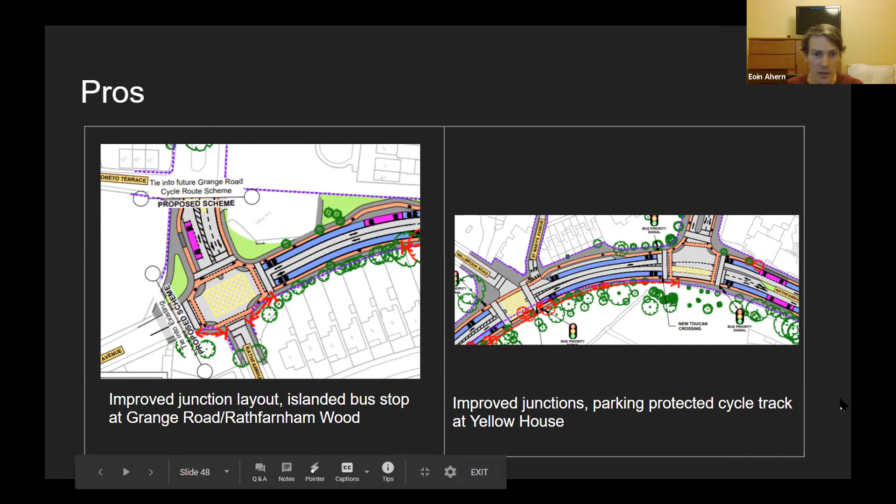Moving further down the route, you can see a couple more junctions that have been slightly improved, at the Yellow House and at Butterfield Avenue. The cycle lane has been moved in behind car parking there for protection, which is good to see as well. Next slide, please.

So then the major concerns: Rathfarnham Road, you can see on the left there, still no cycle facilities on the most direct route that the vast majority of cyclists are going to want to take into town. Again, on the right hand side, the same thing is going on in Terenure Road East, where there's absolutely no cycling infrastructure at all.

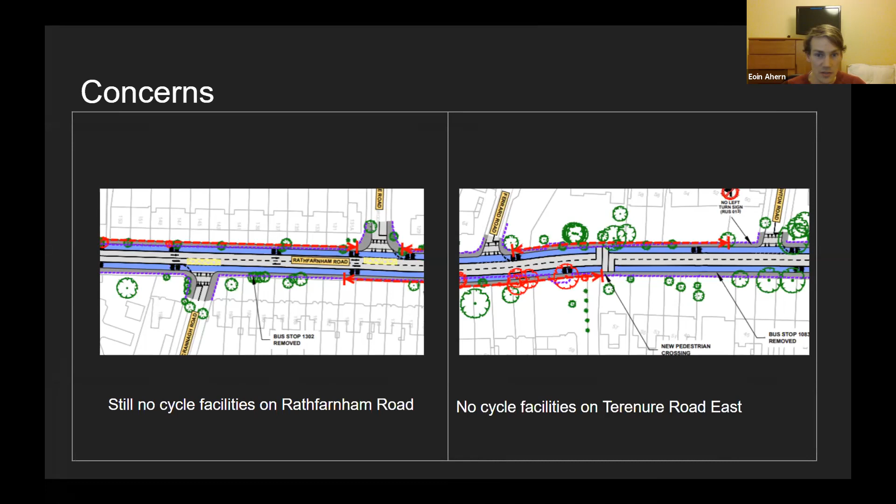So there's a huge amount of work going into that - three river crossings in environmentally sensitive areas, so that's going to be a huge undertaking.

I just think it's going to be a very difficult job to get approval for something like that anyway, also when you think that it's really not going to be used. It's a lot of work for something that's basically nice for bringing the kids out on the weekend, but it's not going to be used by the majority of people.

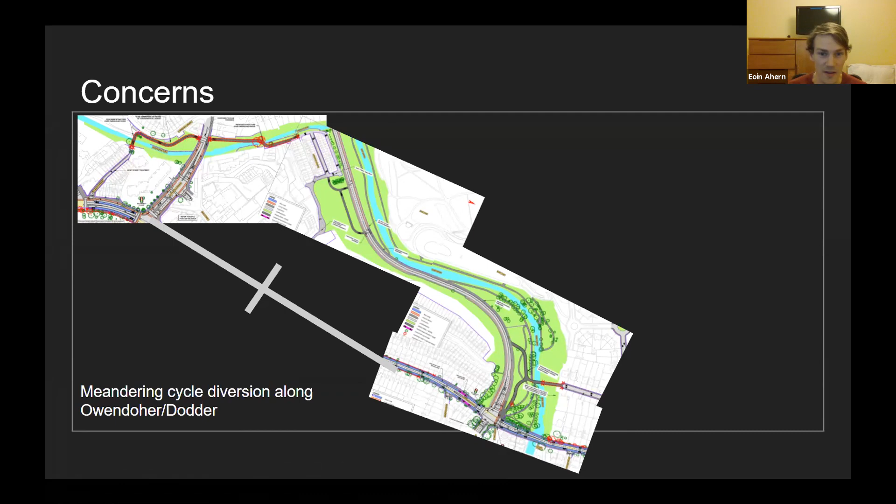We'll just go on to the next slide, please. Okay, so I think there might be an image missing there, but anyway, this is where it links up - sorry, this is where it links up when it comes across the Dodder and links up to Rathdown Park, or Rathdown Road rather.

And again, as Liz was talking about earlier, the quiet street treatment there - that's a really busy stretch of road at the Dodder, or just at Bushy Park rather.

So yeah, we really would need to see what's planned there, because it doesn't seem safe to us. Those are the main concerns with that section. I know there are a lot of questions there in the chat earlier, I don't know if I hit on them all. I know there were residents around Woodview cottages who were concerned. Were there any other queries from people there?

Right, thanks very much, Eoin. I think there's quite a few queries in there that we might just deal with as one, and I promised Yvonne Collins, the councillor, that I'll let her in a minute. But obviously there's a lot of residents from the area here this evening that are not happy about a cycle route through their area, but as they can hear from us, we're not very happy about it either.

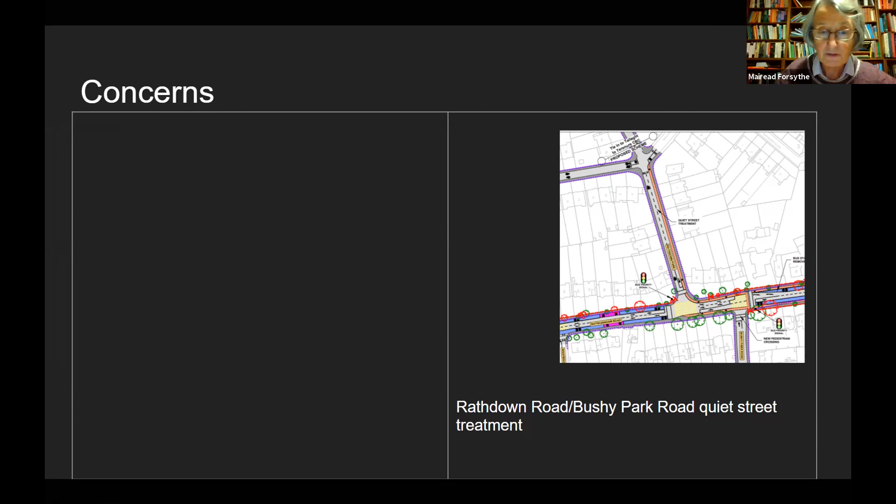Yes, I would love to. Thank you very much for inviting me, first of all, and to DCC for hosting the webinar and for all the presentations, it's been really good. Very interested to hear what you have to say, Eoin, it's great to hear other suggestions coming along.

Very concerned about the plans to route the cycle path along St Mary's Avenue. Firstly, it's very narrow, and I just would worry about the safety of cyclists. Now, I used to cycle and I'm hoping to get back to it, and Jennifer's going to take me out on a cycle if she's still on, I'm holding her to it. But I just can't see how the cyclists are going to fit along St Mary's Avenue.

I rang the NTA and asked, what's a quiet street treatment? Because Elizabeth, I was kind of wondering the same thing. And they said, oh, we do a bit of public realm. And I said, well, how are you going to fit your bit of public realm and the people who live there and the cyclists? And why on earth would the cyclists go there anyway when they could just keep going straight up the road? So we had a bit of an agreement to differ there.

And then you have your bridge across into Owendoher Crescent, which is a nice cul-de-sac at the moment, and it's going to be a loss of green space there. And then crucially, Woodview Cottages.

I don't think they notified Woodview Cottages at all, because I leafleted Woodview Cottages and there was huge confusion - what on earth is happening here? The NTA actually contacted me then because they'd heard I'd leafleted and wanted to know what I'd said. I said I just told them what the plans are. So I'm hoping to get the residents in touch with the design team in the NTA just to see what we can do to make sure this doesn't impact adversely on people's lives.

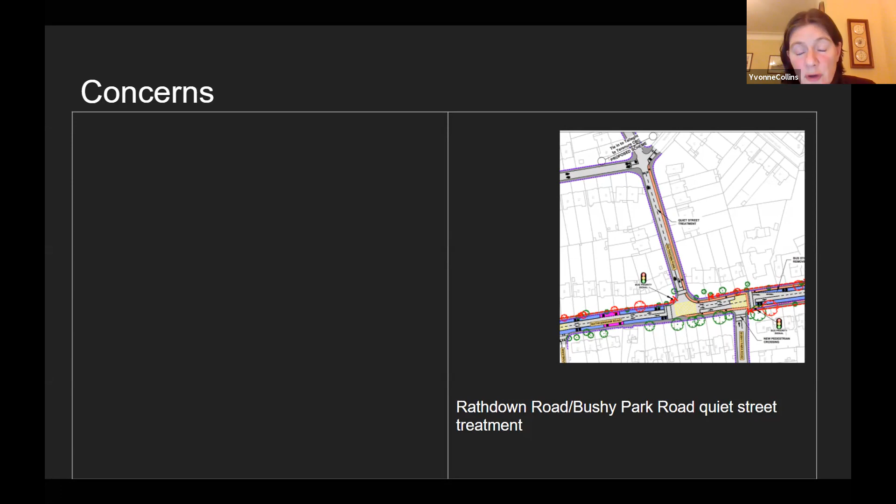And I know all the residents are there as well, and I just think the most important thing I can say is that everybody should put in a submission, even if it's 2 lines, just to make sure your voice is heard. This is a public submission, it's online. It's a bit more difficult than the usual public consultations where we could all have public meetings and everybody knows what we think. It's much more difficult now.

So the 16th of December - I think somebody said the 18th earlier, but the deadline is the 16th. I'd love to get the input of everybody, and I think as well as the residents saying why they feel it's a bad idea, it's great if the cyclists for whom it's intended give their perspective as well. It's hugely valuable, so thank you very much. I know there's a lot of other people who want to come in, so I'll just finish with that. Thank you. Okay, thanks very much, Yvonne.

I wonder if somebody, Bridget O'Donoghue from Woodview Cottage, or somebody else from one of the local residents, wants to make a comment. As they were, you've heard our views that we really don't think cyclists are going to use the route very much - not the experienced cyclists, maybe people going out to bring their children to Bushy.

Can I talk? Niall Cox here, I'm an Owendoher Crescent resident. I'm a cyclist, a commuter cyclist, and I'm very encouraged by the discussion here tonight. It highlights all our concerns - my concern as a cyclist, and our concerns as Owendoher residents - that the route, which is the PC8 route, will not be used. So I'd like to thank everybody for their opinions and the presentation. So appreciate it.